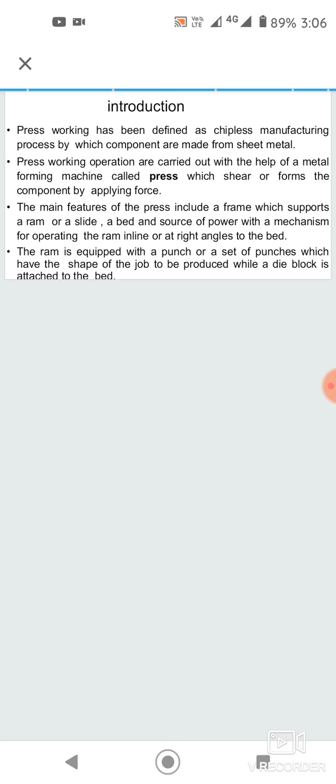Press working operations are carried out with the help of a metal forming machine called a press, which shears or forms the component by applying force. The main features of the press include a frame which supports a ram or slide, a bed and a source of power with a mechanism for operating the ram, inline or at right angles to the bed.

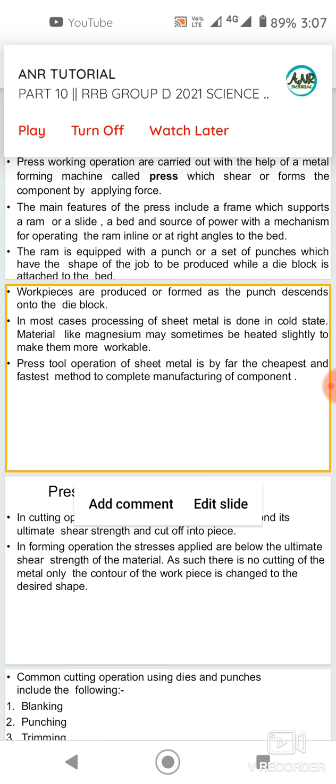The ram is equipped with the punch or set of punches, which have the shape of the job to be produced, while a die block is attached to the bed and the punch is attached to the top of the ram. Workpieces are produced or formed as the punch descends onto the die block.

In most cases, processing of sheet metal is done in the cold state, meaning every press tool operation is a cold working process, that is coining, squeezing, embossing, bending operations, etc. And press tool operation of sheet metal is by far the cheapest and fastest method to complete the manufacturing of a component.

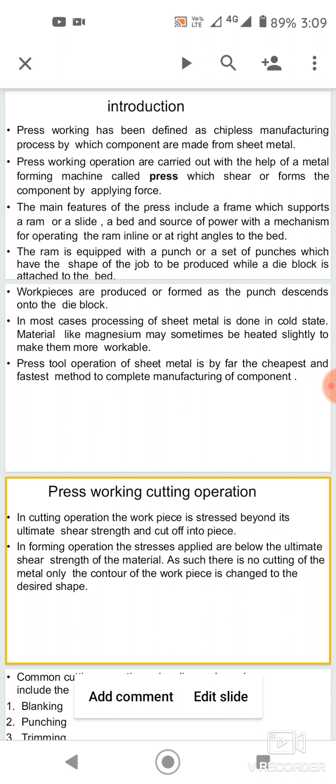Press working involves production of the final component from sheet metal in the cold condition. The working operation is completed by a single stroke of the punch, and the finished part may be produced in less than 1 second. The machine used to apply the required pressure or force in a short duration is called a press.

The press consists of a frame supporting the bed and ram. The ram is equipped with special punches and moves towards and into the die block, which is attached to the rigid body. The punch and die block assembly are generally referred to as a die set or simply die.

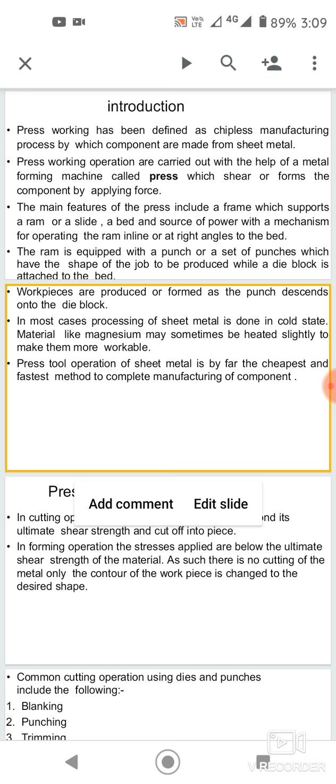Next one is the press working cutting operations. In a press working cutting operation, the workpiece is stressed beyond its ultimate shear strength and cut off into pieces. In a forming operation, the stresses applied are below the ultimate shear strength of the material. As such, there is no cutting of the metal, only the contour of the workpiece is changed to the desired shape.

In common cutting operations using dies and punches, the following operations can be done. That is the blanking operation, punching operation, trimming, shaving, notching, nibbling, lancing, parting, perforating, shearing, drawing, bending.

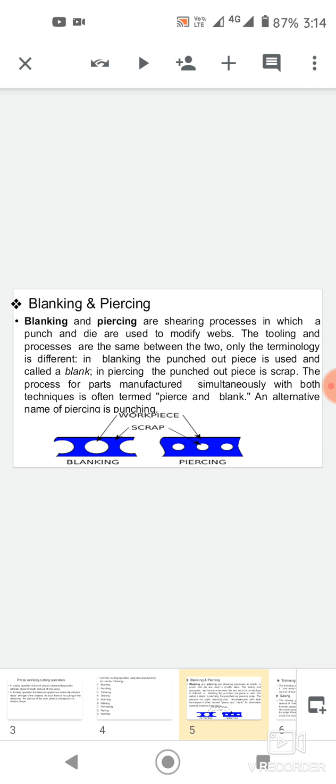The process for parts manufactured simultaneously with both techniques is often termed pierce and blank. An alternative name of piercing is punching. Punching or piercing operation is a process of making a desired hole by using a punch and die. The blanked part is waste and the sheet with a hole left on the die is the desired product. The size of the punch determines the size of the hole and clearance should be given to the die.

Next one is the trimming. Trimming operation is the last operation performed because it cuts away excess or unwanted irregular features from the walls of drawn sheets by using the snips. Different types of snips: straight snip, curved snip, sometimes.

And shaving operation, SHAVING, sorry, by mistake. Shaving operation is a process of finishing the edges of blank to accurate size. The clearance provided for die is very small to give the required tolerances.

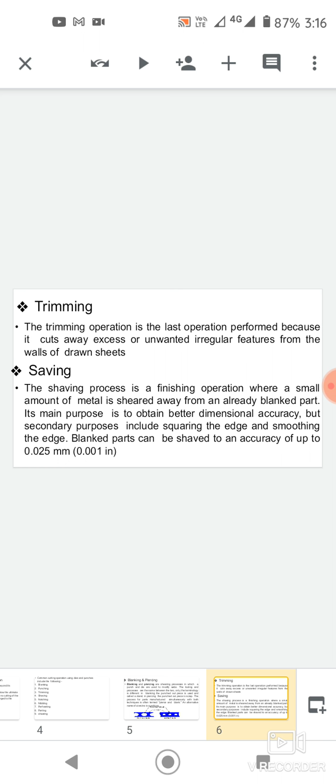The shaving process is a finishing process where a small amount of metal is sheared away from an already blanked part. Its main purpose is to obtain better dimensional accuracy, but secondary purposes include squaring the edge and smoothing the edge. Blanked parts can be shaved to an accuracy of up to 0.025 mm to 0.001 in inches.

Notching operation. Notching operation is that which removes a section from the outer edge of the metal strip or part, and it is cutting out the edges of the strip to obtain the desired outer contour of the workpiece.

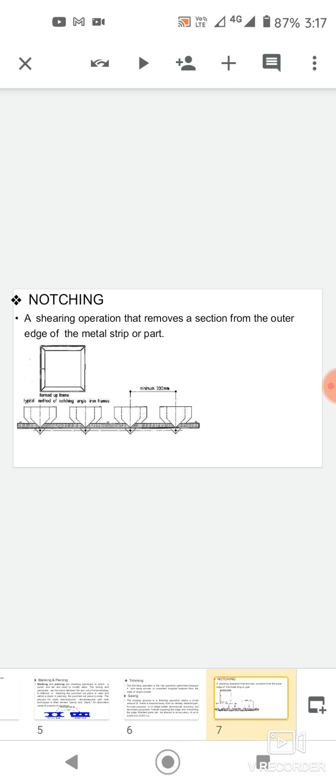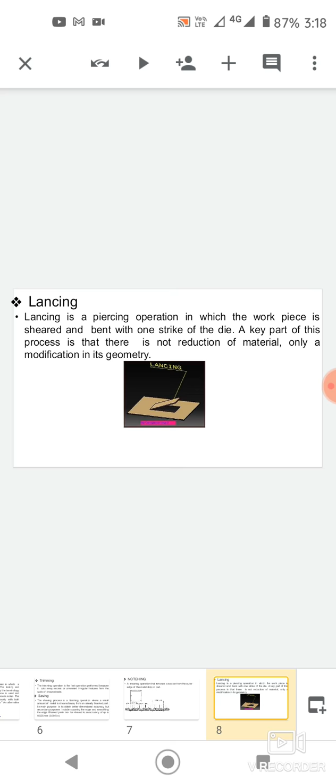Lancing is a piercing operation in which the workpiece is sheared and bent with one strike of the die. A key part of this process is that there is no reduction of material, only a modification in its geometry.

Cutting off and parting operation is the process of severing a piece from a strip by cutting along a single line. The width of cut is neglected. Parting is a process of separating a piece from a strip by removing the scrap; the width of cut is equal to thickness of scrap removed.

The nibbling process cuts a contour by producing a series of overlapping slits or notches. Notching is the process of cutting out the edges of the strip. This allows for complex shapes to be formed in sheet metal up to 6 mm, 0.25 inches thick, using simple tools.

Punches are available in various shapes and sizes. Rectangular punches are common because they minimize waste and allow for greater distance between strokes, as compared to a round punch. Nibbling can occur on the exterior or interior of the material. However, interior cuts require a hole to insert the tool, as shown in figure.

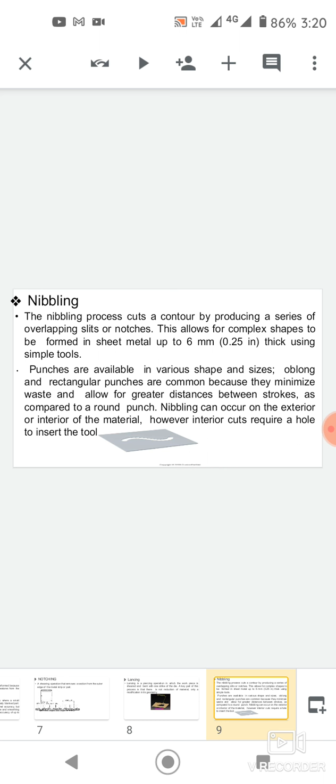Perforating. Perforating is a piercing tooling that involves punching a large number of closely spaced holes, as shown in figure. This cuts small strips or circles. This is called perforating.

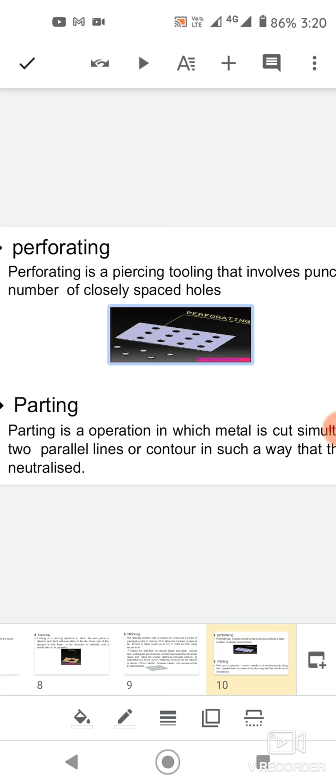And parting. Parting is an operation in which metal is cut simultaneously along two parallel lines or contours in such a way that the side thrust is neutralized.

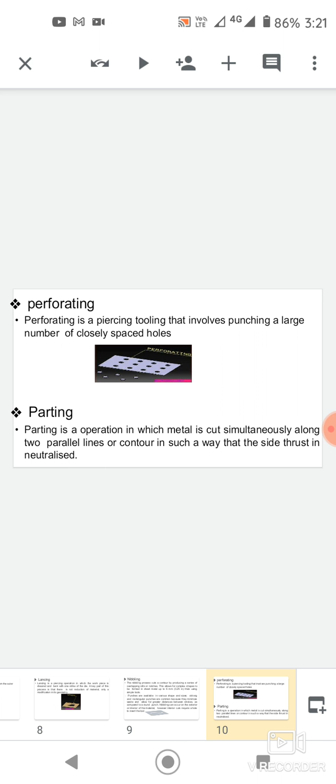Embossing is a shallow forming operation which uses a matched punch and die. The thickness of workpiece is uniform and is intended for duplicating of the pattern on either side of the sheet metal. It is used for decorative sheet work and to obtain the impression of desired form.

And among shaping operations, the coining operation is also one part. Coining is a squeezing operation in which the metal flows into the cavity between the punch and die. It is employed for making coins, medals, and similar articles.

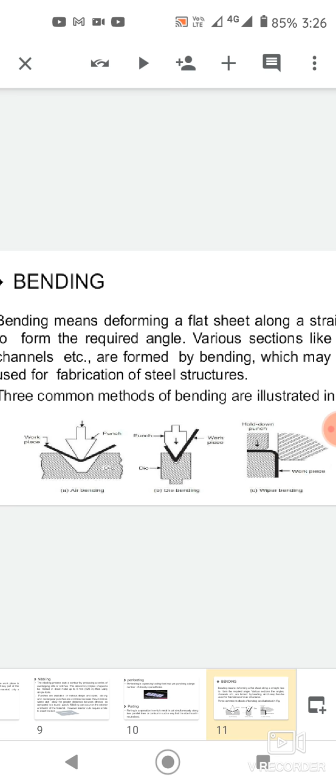Bending is a cold working process which consists of uniformly straining flat sheets or strips of metal around a linear axis. Metal on the outside of the bend is stressed in tension, while the inside is compressed, and the metal tends to become slightly thinner at the bend as shown in figure. Arrangement of tools required for a flat strip metal: this is the die bending, air bending, and wiper bending.

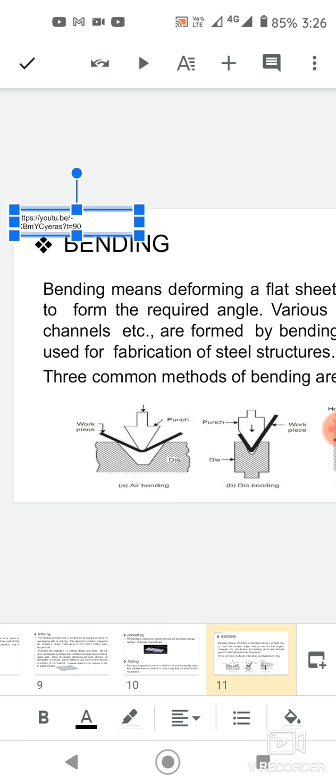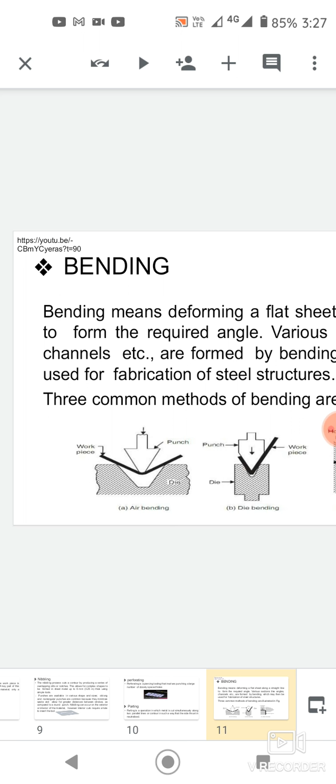In V bending, a metal strip is placed on a die of wedge shaped cavity and is forced into the cavity by a wedge shaped punch. The bend angle may be less than 90 degrees, 90 degrees or more than 90 degrees. This is the die bending and air bending, and wiper bending is the edge bending.

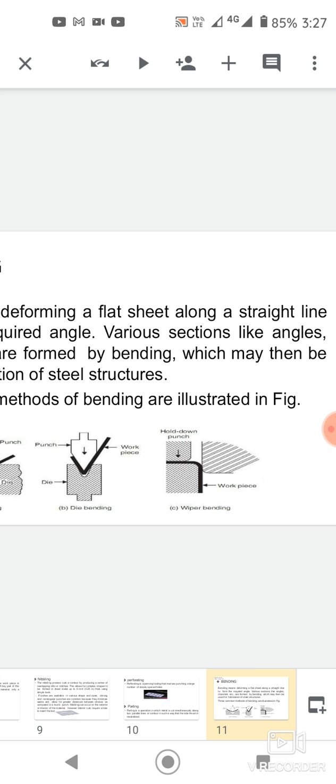In edge bending, the strip is held in the form of cantilever on a flat die, and the unsupported length is forced against the vertical face of the die by a flat punch as shown in figure.

Next one is the embossing process. In embossing, impressions are made on sheet metal. It is a shaping operation in such a manner that the thickness of the sheet remains uniform all over even after embossing has been done. It means that if one side of the sheet is raised to a design, there is a corresponding depression on the other side of the sheet. Basically, it is a pressing operation where not much force is needed.

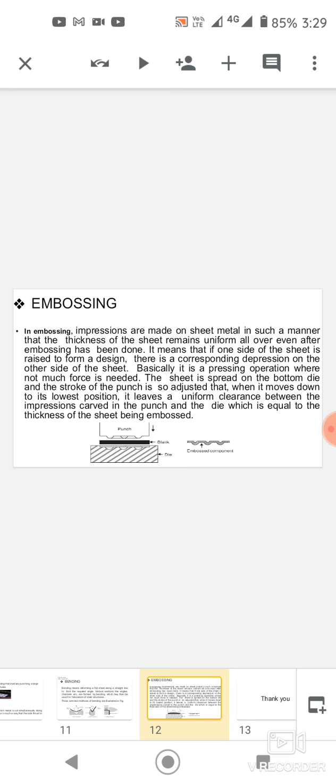The sheet is spread on the bottom die, and the stroke of the punch is so adjusted that when it moves down to its lowest position, it leaves a uniform clearance between the impressions carved in the punch and die, which is equal to the thickness of the sheet being embossed.

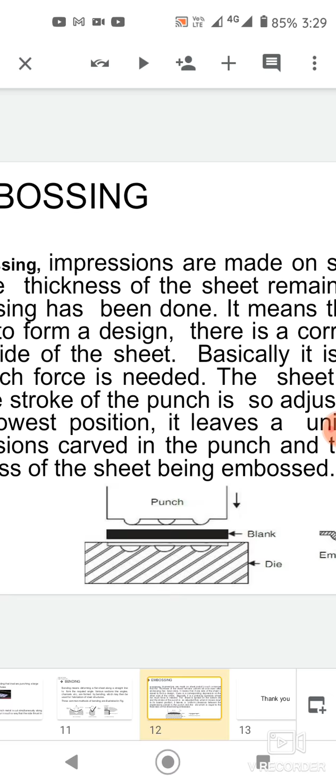This is the figure. The punch is attached to the ram and the die is attached on the work table, and the blank is in the middle portion of the punch and die. It is pressing with a single stroke of the punch, and the embossed component is the final product. This is the finished product.

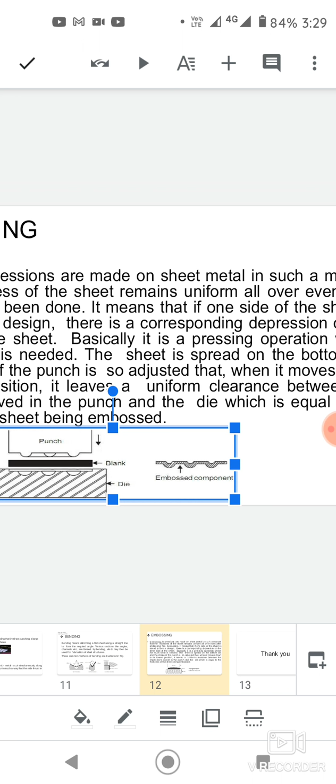Embossing is a shallow forming operation which uses a matched punch and die as shown in the figure. The thickness of the workpiece is uniform and it is intended for duplicating the pattern on either side of the sheet metal. It is used for decorative sheet work to obtain the impression of the desired form.

And the coining operation. Coining is a squeezing operation in which the metal flows into the cavity between the punch and die. It is employed for making coins, medals, and similar articles.

And shaping operations are beading and curling operations. These operations involve forming of edges into a roll to increase the strength and appearance. Also, they eliminate exposed sharp edges. These are used in manufacture of hinges, fans, and similar items.

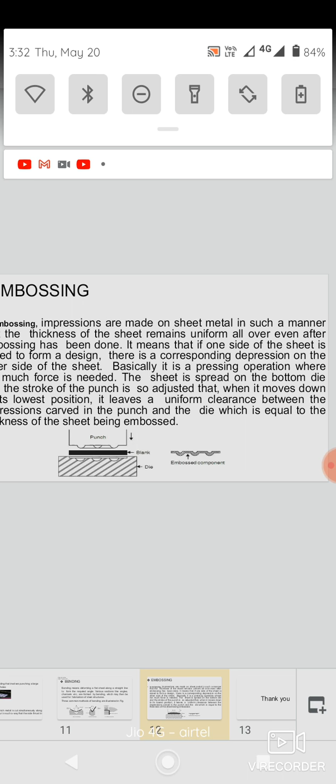Then bulging operation. Bulging is a forming operation in which the portion of a drawn shell or tube is expanded. The force required to expand the sheet is transmitted through media such as oil or water. Hole flanging. Hole flanging or extruding is the process of forming a flange around a hole.

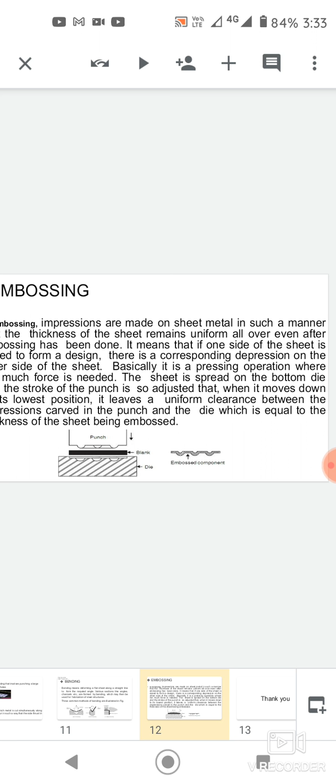Next one is the squeezing. Squeezing operation is similar to coining operation except that the metal is not confined in the die. Flash as a result of overflow of unconfined metal is removed in the subsequent operations. And in the drawing operation is the bending operation, V bending and edge bending.

Drawing is the process of producing hollow shapes such as cups and dishes from a flat sheet metal. Drawing process can be classified into two types, that is the deep drawing and shallow or box drawing. In deep drawing, the height of the component is greater than the diameter or width. In shallow or box drawing, the height of the component is less than the diameter or width.

Spring back also is one type of operation in the press tools, that is, the deformation which has been accompanied by bending is partly plastic and partly elastic. When bending force is removed, there is some elastic recovery resulting in a slight decrease in bent angle. This is known as spring back. It depends on the material. Its value for low carbon steel is 0 to 2 degrees, for medium carbon steel 3 degrees to 4 degrees, and for spring steel the spring back can vary from 10 to 15 degrees.

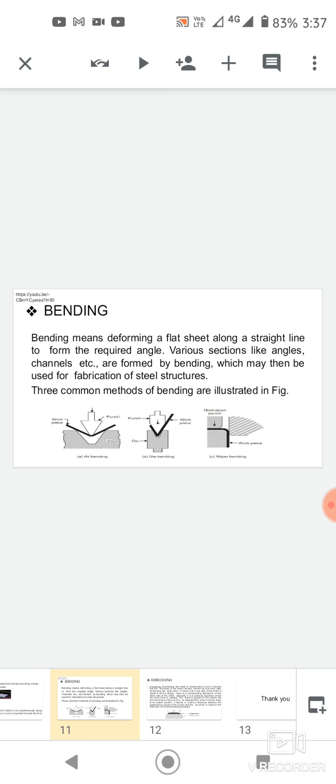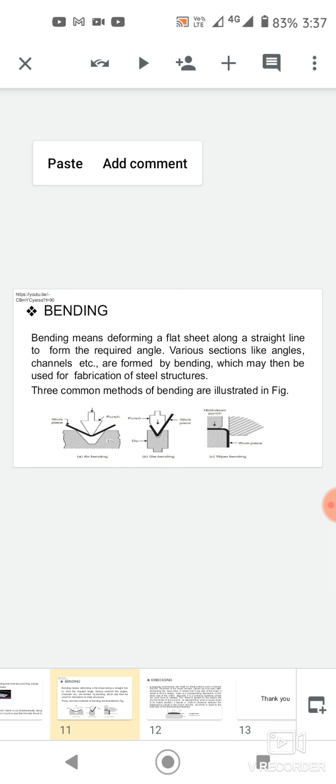It is very important in the press tools chapter, that is, define blanking, what is clearance, define trimming. These are short questions, very important for the main theory examination. And how is the size of press designated, and state the desired properties of punch and die material. Properties of punch and die materials are high heat and wear resistance, high strength and toughness with good quality and toughness with good machinability.

And the essay question for the main examination is the difference between blanking and piercing. For blanking, the clearance is provided to the punch and die is made to size. In case of piercing, the punch is made to size and the clearance is provided on the die. In blanking, the part blank is useful, whereas in piercing it is a waste and a sheet with a desired hole is useful. And another question is explain the term spring back associated with bending operation. And the differences between coining and embossing operations.

Coining and embossing are both shaping operations in which the metal is deformed into required shape by using punch and die. The main difference between coining and embossing operations is that coining is carried out in dies in which the metal is confined and its lateral flow is restricted, whereas in embossing the blank is stretched to the shape by means of punch and die, and there is no change in thickness of the blank. In coining, thickness is changed to make products such as coins and medals. And coining involves squeezing, whereas embossing involves a combination of bending and stretching operations.